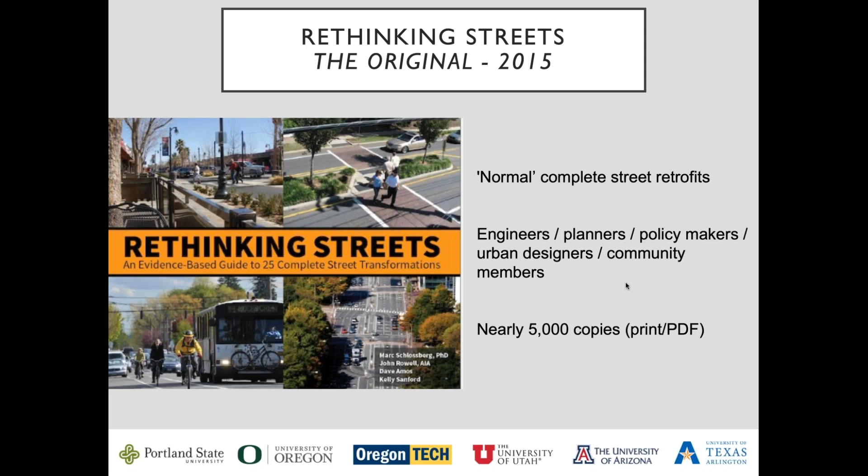So that went really well, and there were some biking projects in there, but they were just okay. For those of us who do work in bicycle transportation, we know that just okay bicycle infrastructure in a lot of instances isn't really much better than no bicycle infrastructure at all. It might look good on paper, a line on a street might look okay in theory, but in terms of its actual use and its level of comfort for a diverse range of users, it might not serve much of a purpose.

So Rethinking Streets for Bikes came about, and our goal here was not to look at normal, average, just-okay projects, but to find excellent examples of street retrofits for people on bikes from across the US and a couple of examples in Canada—really excellent examples of a range of different types of retrofit projects—using the same approach as in 2015: present finished projects, not hypothetical ones, and communicate information in a way that a broad variety of community stakeholders could use to help make changes in their own communities. So that's what we're going to go through.

Our purpose here is to show evidence that the world won't end when you build a great bike system. That might not sound like such a radical thing to say, but for those of us who work in this area, it's amazing how threatening building better bicycle infrastructure seems to be to many people, when in fact it's actually the opposite. Not only does the world not end, but many things tend to improve.

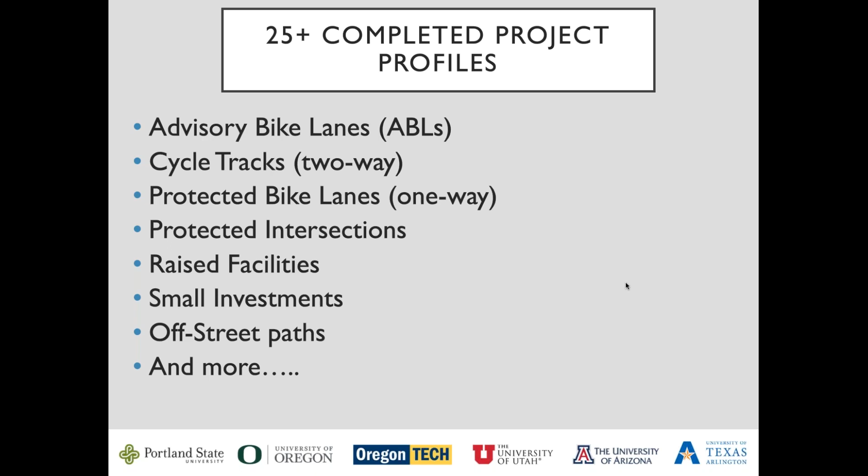And we have a couple highlights on some off-street paths. Clearly there's a lot of examples we could draw from, and we reduced these down to 25 core examples that we thought give a good breadth and depth for each of these topics. There's also some more information included in the book that I'll get to in a moment.

Just looking at the before and after can tell you a lot about the condition. In particular, looking at streets that look like the streets that exist in your community, in my community, and thinking, I wonder what could be done with that. Then being able to see the after image really starts communicating a lot. Of course, we also give a little bit of demographic information about the location and the metropolitan population size.

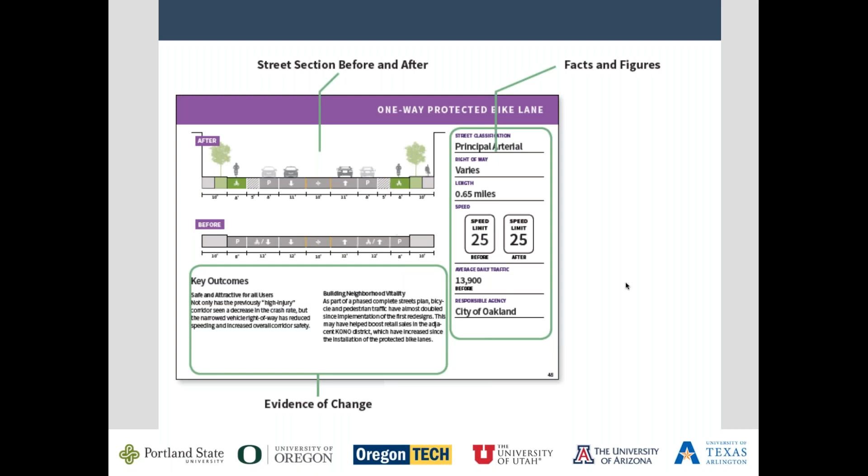And then there's some additional context that we're providing: what was happening in that environment, what is that environment like. The last page typically includes some images and additional ways to understand the context of the location and its use. So that's how the cases look.

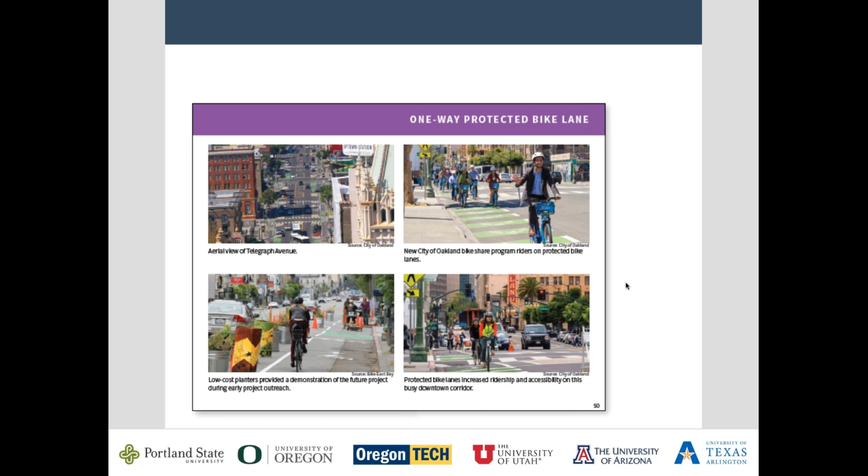In addition to the cases—and we'll go through a few of them in a moment, Roger will lead us through that—we've also included some different information designed to bring more people who are not living day-to-day in the transportation world in our communities up to speed about some of the ways to think about transportation decision-making.

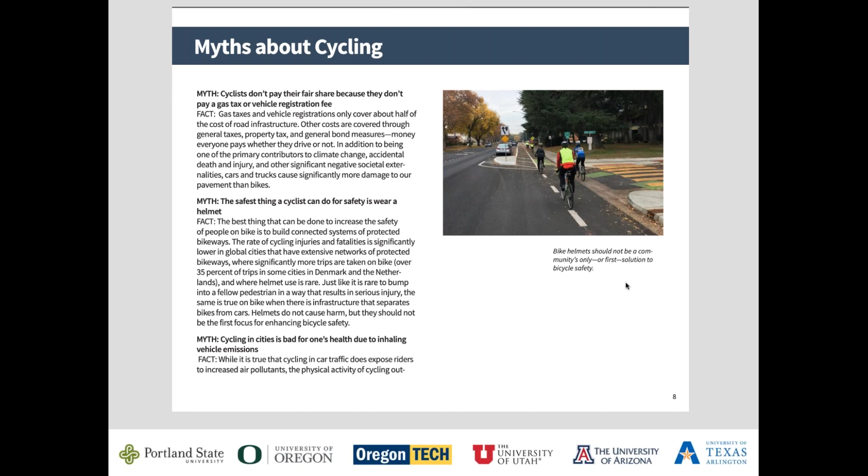We include a section here about myths about cycling. These come from anyone who's out there on a bike or engages in conversations with people about bicycle transportation—you probably hear lots of complaints, and they tend to be myths. So we have a section here, all with references, around some of the myths, like cyclists don't pay their fair share for the roadway, or the safest thing you can do on a bike is wear a helmet, etc. This is one of a few pages—I think we have 10 myths included. So again, additional information to bring a wide variety of people up to speed on some of these issues.

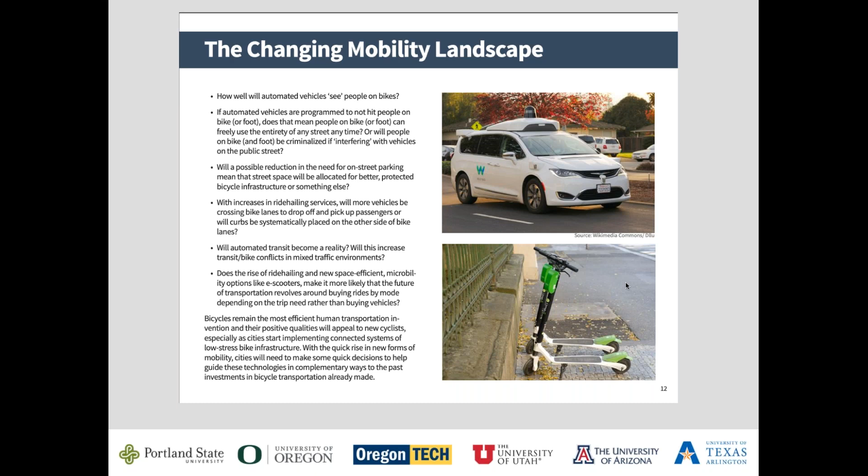We've included a little bit around the changing mobility landscape. We started this project about 18 months ago, and wow, things have changed a lot in that time. The rise of autonomous vehicles—their development and deployment and expected deployment—and the implications of autonomous vehicles on parking, on street right-of-way, on individual car ownership. So many changes going on there. And then, of course, in the last 18 months, the quick rise and deployment of e-scooters in particular has really changed the mobility landscape in significant ways, or indicates that big changes might be in store. So there's a quick discussion about some of those changes happening here, which we feel really glad we didn't finish the book 6 months ago, because it would have been out of date by not including this information.

So with that, I'm going to turn it over to Roger, and he's going to go through a variety of the examples—not really in depth on any individual one, although maybe a little bit—but to give a diversity and wide array of the types of things we're doing, or the case examples we're profiling.

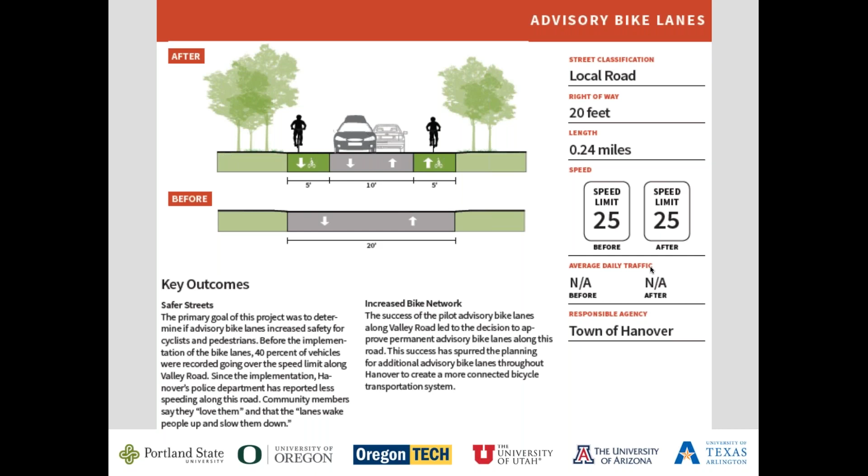As Marc had said previously, a lot of the work we focused on in this project was facilities that would help those riders who want to use their bike more often but are quite uncomfortable about riding immediately next to traffic. And there's obvious safety benefits involved, comfort level, and lowering the cyclist stress level as they go through here.

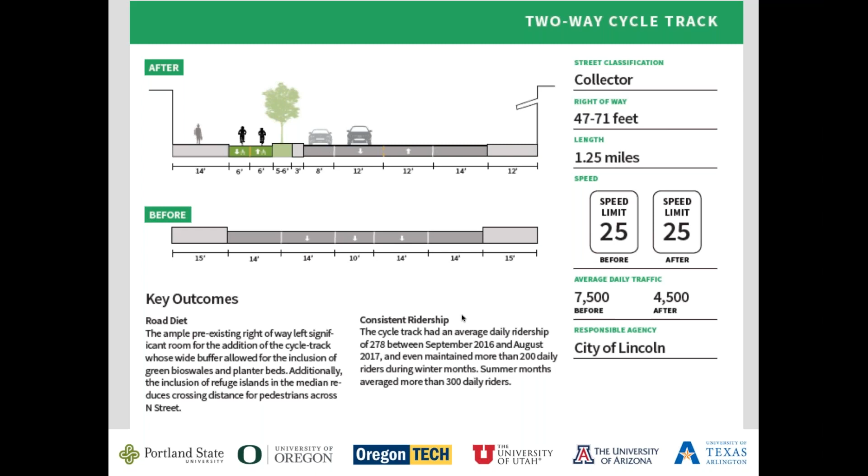As we move to the next slide, Mark, we get to the second page of the spread, and this one was very important.

What I learned on this project - I had been an avid bicycle commuter for many years, and I guess lost the context sometimes in my bicycle commute where I just knew my pathway, but how important it is to have an interconnected bicycle facility system.

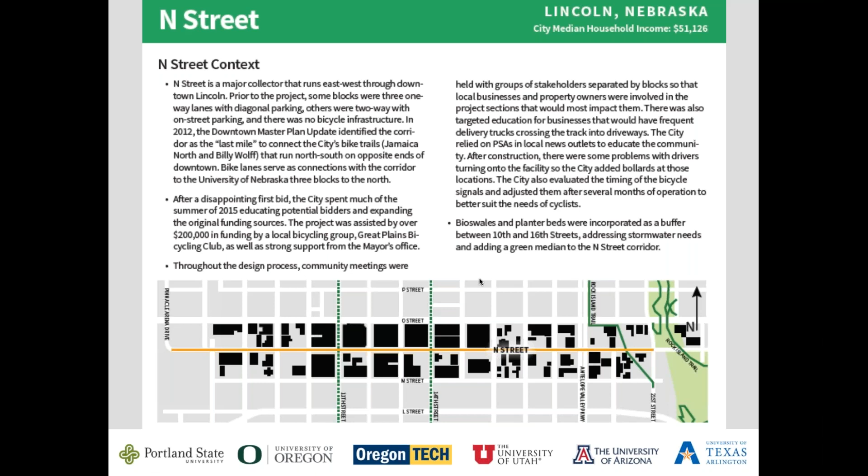So we wanted to make sure that we weren't looking at projects like N Street here in isolation. So we have a key map, indicative of each of the key maps in the book, connecting to other quality bike facilities, be they other protected bike lanes, dedicated bicycle paths, off-street paths, etc. So the context page we think was really important. Although every city and town will have unique contexts, we're hoping that by showing a variety of implementation strategies, you will find some examples that might be close to the streets you're trying to retrofit in your community.

And then moving to the last page of the spread - a picture is worth 1,000 words. So what we try to do here is give even more context, again, in a highly visual way. This is meant to be quite literally the coffee table type book, where you flip it open, you look at examples that are of interest to you, that look like they would be similar to what your city is wanting to implement.

By providing some pictures here, we allow you to see how, for instance, the City of Lincoln implemented their bike facility enhancement along with pedestrian safety measures. You'll see the bulb outs on the intersection on the lower left. You'll again see how bioswales and other stormwater management techniques were implemented at the same time. Roadway drainage is always an issue when you have large expanses of impervious pavement, so we're trying to share information about how a bike retrofit project becomes part of a larger street retrofit.

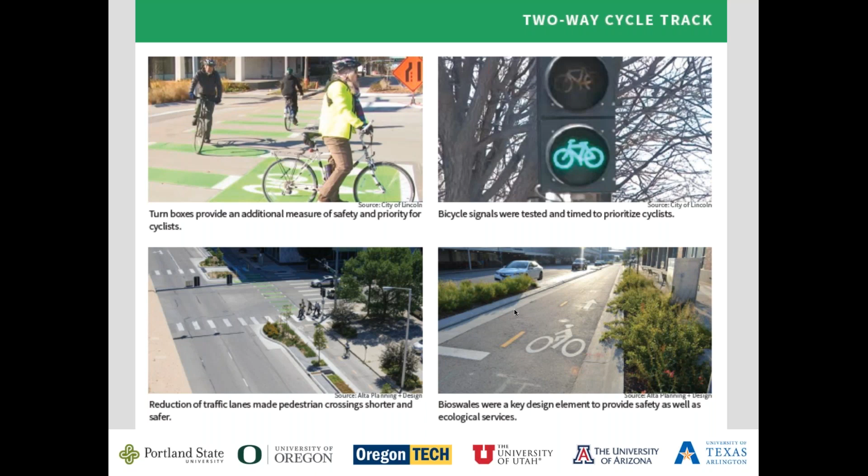In fact, several of the projects that we profile here didn't start off as really bike projects. They started off as resurfacing projects or stormwater management projects into which bicycle facility design could be incorporated.

So as we move from two-way cycle tracks to the next slide, we see protected intersection - this particular one is in Salt Lake City. And of course, protected intersections, while new to the US in the past few years, have been popular in Europe for quite some time. When we think about our transportation network being a series of links and nodes, all too often in the past we've focused on the links, putting in first bike lanes and then perhaps protected bike lanes, other types of facilities, oftentimes in an urban area with a number of signalized intersections.

In these cases where you have a protected bike lane coming into an intersection, the rider is faced with dealing with regular vehicle traffic, perhaps high-speed turning traffic. So the protected intersection is a way of continuing that level of protection for the rider, whether they're making a straight through path through the intersection. And I think the Salt Lake City example is very indicative of an intersection in urban America.

Look at the before picture and you will just see a sea of asphalt. And while in the past, engineers may have said, oh, that's great, it's a sea of asphalt, what we've got is some no man's land in the center there. You'll notice that in the after picture, we're really able to take that sea of asphalt, divide it up, let the vehicles know where their area is, let the pedestrians know where their area is. You'll see parallel crosswalks with the bicycle crossing.

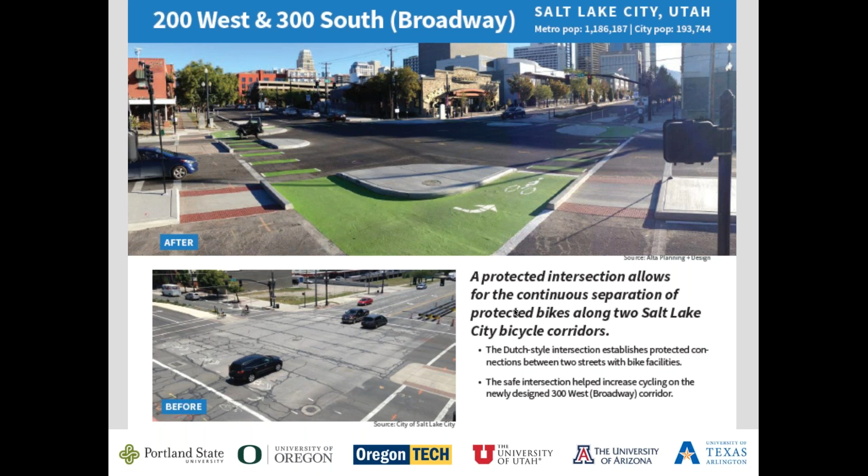And then as we move to the next slide, Mark, what we've done for the protected intersections is given a plan view with some circulatory patterns, again, for the automobiles, for the bicyclists, as well as the pedestrians. You'll notice a key design feature here. Mark said we wouldn't go too far into the weeds, but I do want to point out how important it is to have those right-hand turning vehicles moving more slowly through a protected intersection, putting them in a good position to yield the right-of-way to cyclists, particularly on right turns on red where those are permitted.

And you'll notice in Salt Lake City here, they have made those curb radii quite small, which naturally decreases the speed for the right turning traffic. You'll also see in the key outcome area a description of the types of streets. In this case, it's two collectors, given some ADT levels, speed information for the connecting streets.

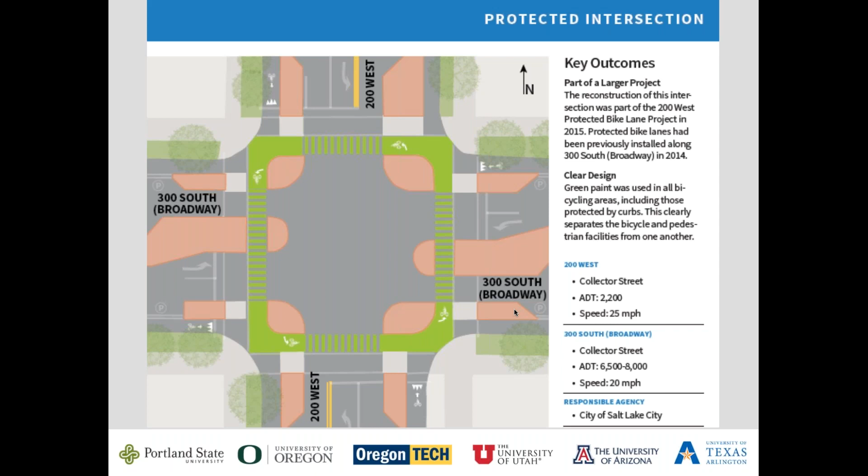Moving on to our next facility type, which is a raised facility. Here we are back in a smaller community in Jackson, Wyoming. You'll see a bicycle facility that is provided at curb height, but completely separated from the pedestrian pathway. It's important to realize we're not talking about just having a widened sidewalk. What we're doing is a raised facility.

This one was done at a relatively low cost, leaving the existing curbing in place, taking a portion of the right-of-way, allocating it to pedestrian movement, and then to this raised bicycle path. You can see in the before picture what it looked like, where the street was immediately adjacent to the sidewalk. There are really two key features here, thinking in terms of the user: we're separating that bicycle facility from both vehicle traffic and pedestrian traffic, giving a safe mode for each.

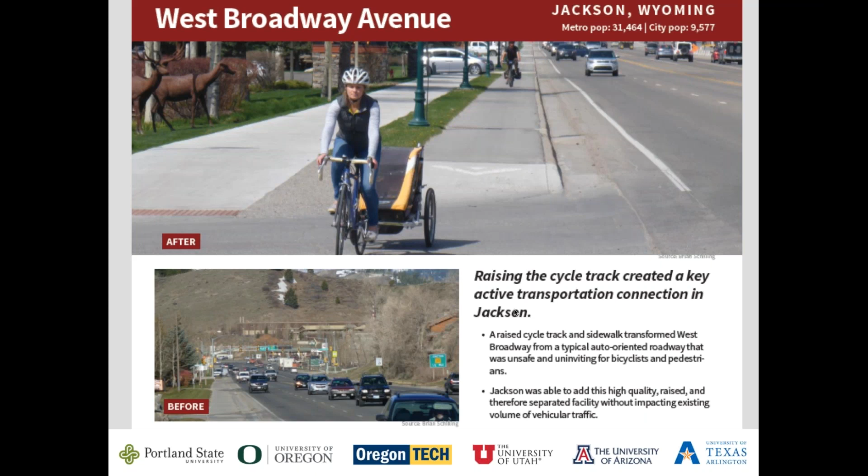The next slide will show you again how the cross-section has been adjusted. No widening of the right-of-way was required. It was really a repurposing of space, in particular taking some green space on the left-hand side and allocating that to the raised bike lane. On the right side of the picture, there was an existing sidewalk that has now been moved away from vehicle traffic, which itself is a safety feature, and then providing the bicycle lanes.

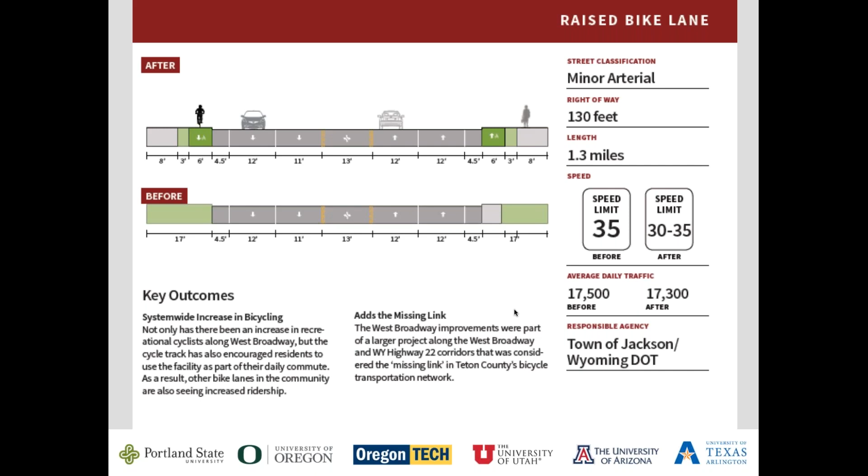Moving to our next type of example, you'll see there's more and more of these. We have 25 projects in total, several in advisory bike lanes, protected bike lanes, two-way cycle tracks, raised facilities—a great variety. We found some additional areas we wanted to share with you, some of which could be either really low cost or very short but key elements to bicycle facilities. We call that our small investment section.

In this case, it's one in Portland, Oregon. We also have a small number of off-street pathways that were important in the context of an interconnected bike facility in those locations.

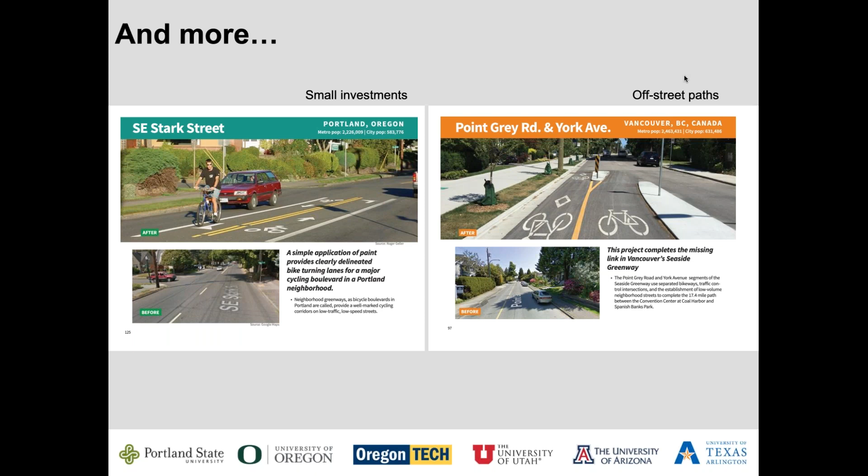In addition to profiling all these wonderful projects, we also wanted to celebrate those of you out there right now working for city and state agencies, for consulting firms, that are making a difference—we call that our change makers. We have 5 change maker profiles in the book. We want to celebrate you, and really this book could be thought of as celebrating successful projects, and in that way celebrating the work of these change makers.

Courtney Geary is an example of someone very excited about the work she's doing in Tennessee. I believe it's important for us as engineers and planners to have role models, to see people making changes. It doesn't matter whether you're in a small town or working in a very large agency—it shows how one individual or a small group can have a big impact on new projects in their location.